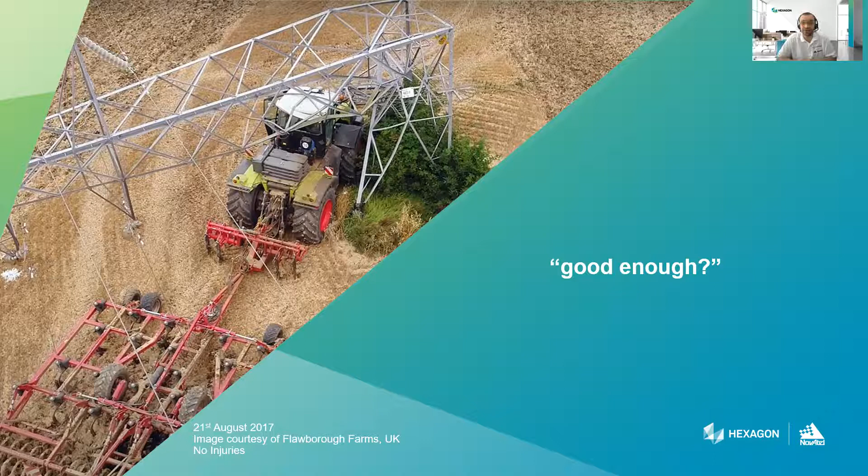In autonomy, in order to be safe, efficient, and reliable, we need to move away from the good enough approach and focus on how we can calculate the vehicle's position with a higher level of accuracy, precision, and integrity. As the production and scale of autonomous machines grow, as an industry, we have the responsibility to avoid and mitigate future risks, thus preventing scenarios like the one shown in the picture here when in autonomous operation.

If we take a high-level view of the GNSS and vehicle control structure, in the majority of agricultural vehicles today, they're all formed of a similar architecture. First, we have a GNSS receiver, some IMUs on the vehicle, and a vehicle controller. And then externally to the vehicle, some form of GNSS constellation, whether that's the American GPS, Russian GLONASS, BeiDou, Galileo. And finally, we have some form of correction source. This might be a local RTK station with transmission over radio or VRS network transmitted over cellular, or even satellite delivered corrections. In a manned solution, these systems usually operate very well in the majority of scenarios.

And the ability to fall back to level one automation is always there. Basically, an operator can take control of the vehicle at any point to resume the operation. But for automation, we need to achieve a position that is more than just there the majority of the time. Any interaction an operator has with the vehicle is essentially a failure of automation.

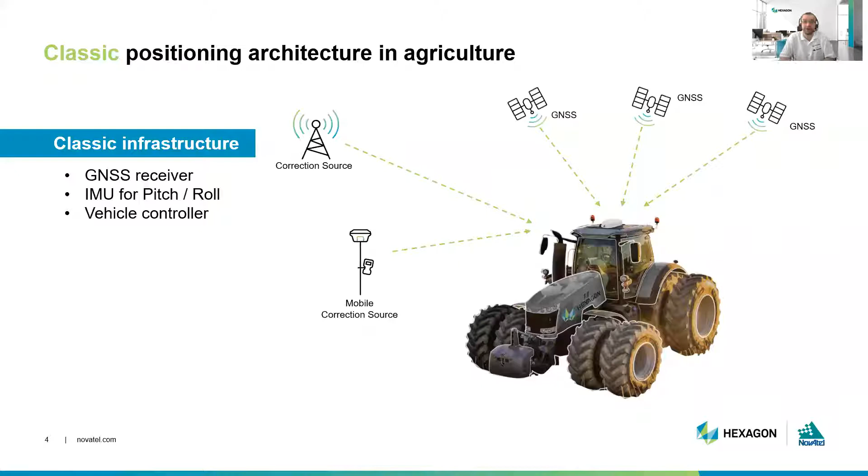So by far, the most common failure of classic GNSS position is the lack of availability or view of satellites. Objects such as pylons, trees, buildings can all have a negative impact on the calculated position. This severity might be from a few centimeter deviation up to a complete and full position loss. The view of satellites is compromised by physical block or manipulation of the signals, thus something very hard to mitigate. A single receiver on its own cannot verify its position, and it's also very vulnerable to jamming and spoofing of positions, which unfortunately is an increasing global risk.

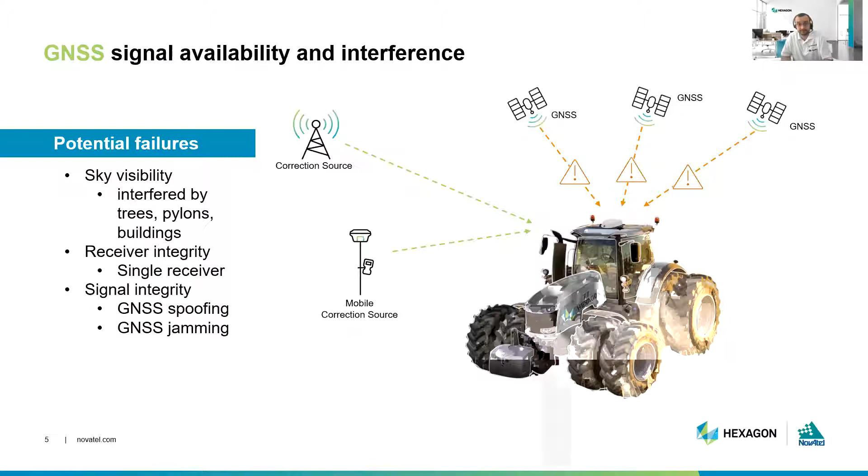For higher accuracy operations, there's a reliance on a correction service. This needs to be delivered somehow to the vehicle. This communication channel, whether it's UHF, L-band satellite, or cellular, is passing through a lot of infrastructure which is vulnerable to failure, even before reaching the vehicle. Furthermore, the correction sources' accuracy and integrity can be very easily compromised, especially at end user installed solutions such as mobile base stations, farmer installed networks.

But then you also have the limitations of the baselines of approximately 40 kilometers. And the further you get away from the base, the further you have a degradation of your accuracy. So the lack of consistency in the solution leads to risks of objects and obstacles, field boundaries, and logistics points that are being mapped having correction source mismatches. How do you know the correction source used to survey a field is the same correction source as the vehicle that's going to be operating in the field?

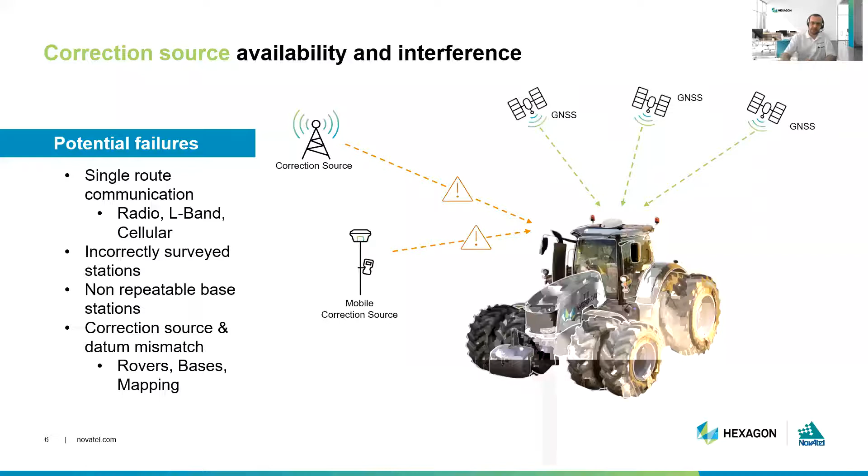And finally, again, a single receiver on a vehicle brings potential ambiguation of the heading, especially at low speeds or when we're static. Compasses and gyros are exceptionally good when movement is occurring on the vehicle. However, from cold starts or after being idle for a length of time, this heading can actually be compromised.

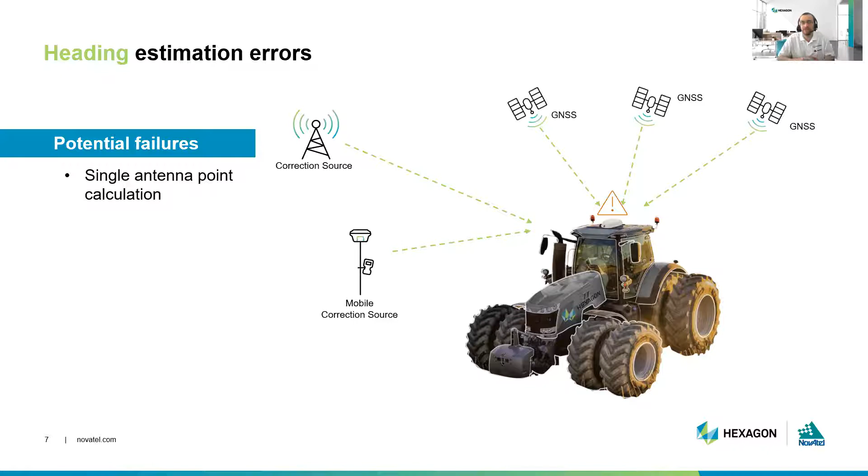Look into the future when we aspire for vehicles to be operating at level 4 automation and above. We want the operations to be smart. We want the vehicle to be stopping for weather. We want it to be stopping for obstacles. We want it to be stopping for ideal spray conditions. So the vehicle needs to be able to effectively and safely resume an operation. And these small factors are essential for the customer to receive the best possible experience of his product.

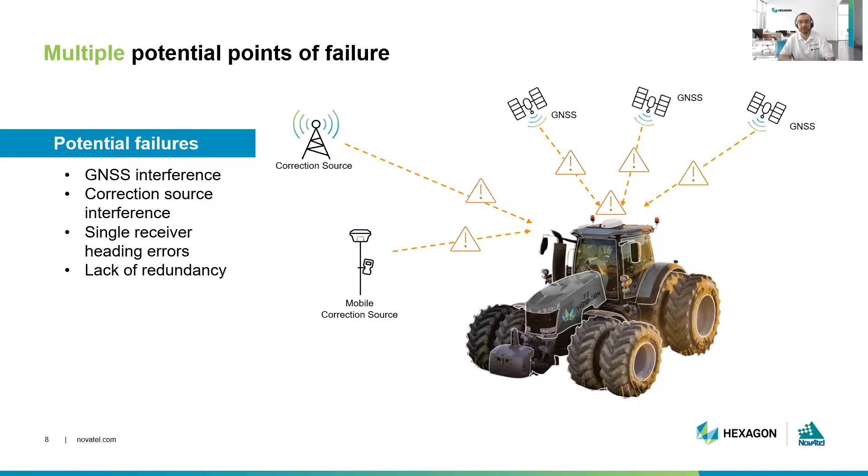Okay, so overall, there are multiple potential points of failure and multiple points of potential ambiguation, which leads to the classic GNSS approach not really being good enough to solely rely upon for positioning in autonomy. So these limitations have been identified by our customers, and it's been driving ourselves to build products and solutions which can help mitigate the scenarios and problems that I've highlighted. So let's talk about some of the ways that we've overcome these problems. Well, first, we need to recognize what is our aim, what is our requirement for position in autonomy.

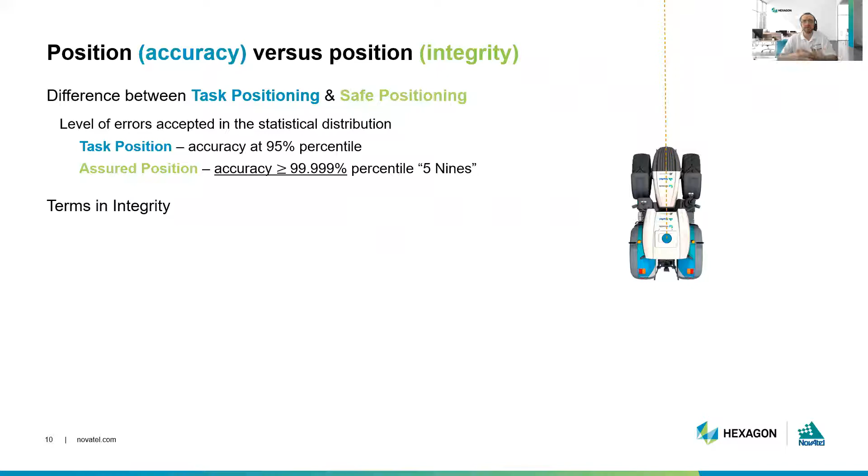From a positioning standpoint, we can break the requirements down into two main signal goals. First is the task position. This is the accuracy that we need in order to achieve our task, whether it's seeding, disking, harvest, or any other operation. Today, we're used to up to 2.5 centimeter accuracy, and that's deemed ideal for nearly all operations. However, the position is statistically only accurate 95% of the time. And this is not reliable enough for full automation. A combination of the factors that I've listed before and some others means it cannot solely be relied upon.

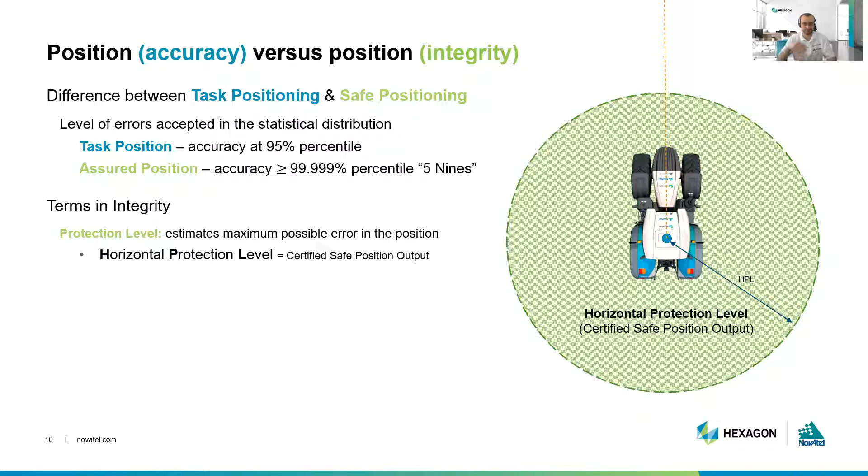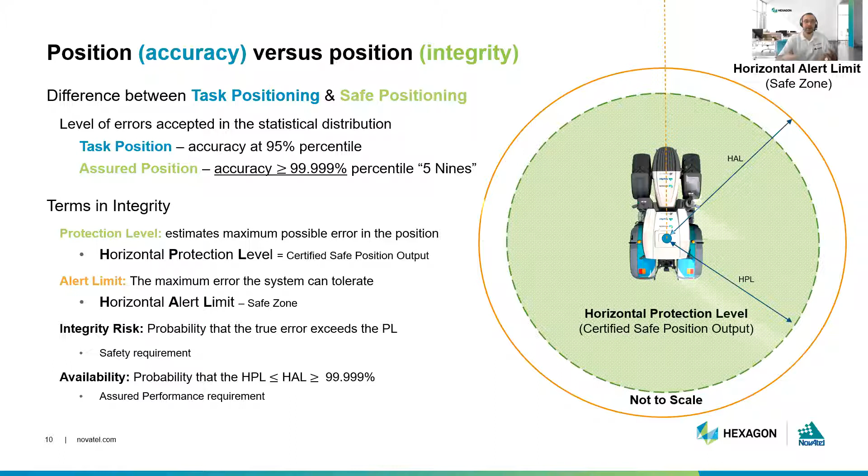The second position is what we call the safe position. And this is an assured position, which ensures up to the five nines that the position is accurate. Now, this means 99.999% of the time, we can assure that that position is within the accuracy that was stated. So based on the application and scenario, the aim is to keep the position output, or the HPL, under a safe zone or a threshold, with an integrity higher than the safety requirement of the system. And only when this criteria has been met can you provide an assured position for 99.999% of the time.

So from the Hexagon and TerraStar perspective, there are several ways in which we're building up the confidence, integrity, and availability of our solutions in order to move away from the classic good enough towards assured positioning. One key part of the solution is ensuring that the corrections or the correction services used can be consistent across the entire fleet of vehicles and data providers that might be involved in the operation of the autonomous system. The TerraStar service can provide an automotive safety and integrity level required for the customer's particular requirements.

Across the entire chain of the solution, redundancy and risk mitigation has taken place to make sure that we can help our partners achieve their functional safety goals. These services are available globally, thus removing the requirement and reliance on local infrastructure or even mobile base stations as part of the solution.

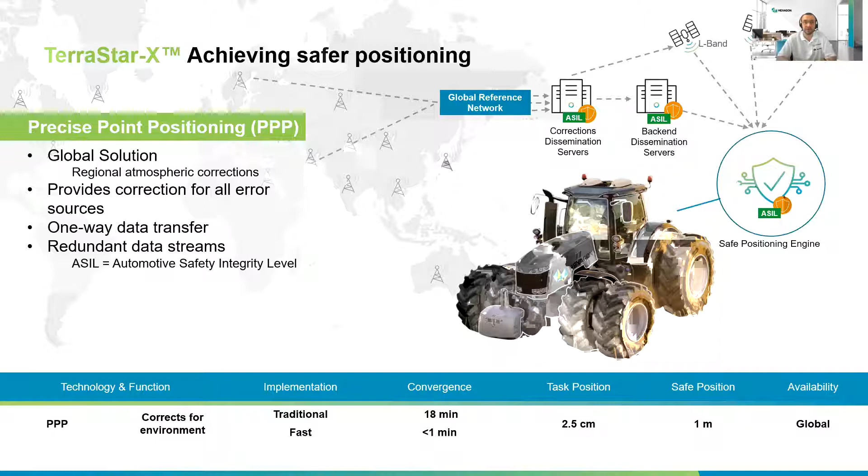Solving the problem of heading and position integrity, multiple receivers can actually be paired with each other, which can give higher levels of position confidence as well as static heading from initialization without the need for an operator to move the vehicle or calibrate like would be with a single GNSS with IMUs.

The ALIGN function today already exists within our receivers' firmware, and it provides a quick way of pairing two receivers for reliable heading, or allowing multiple receivers on multiple rovers working together in proximity, which is ideal for a leader-follower type scenario or implement guidance. That way you can get a reliable relative position between multiple points in a field.

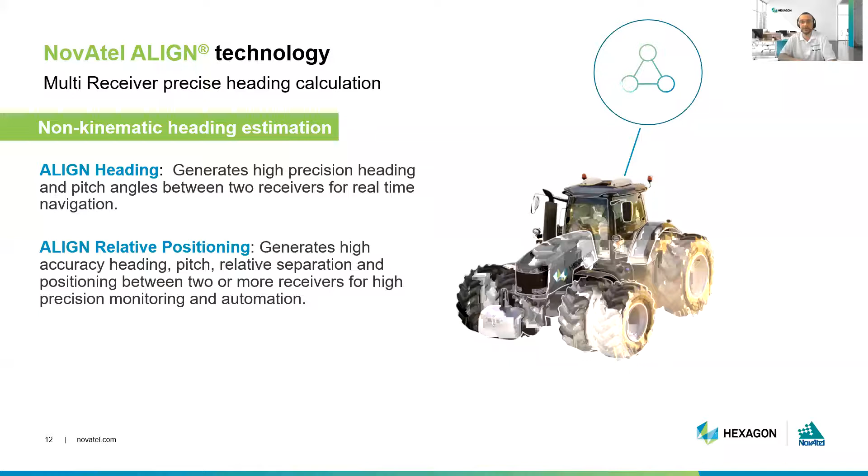Furthermore, depending on the use case, it's possible to bring extra sensor information into the positioning engine. This might take the form of gyroscopes, which we have already added with our SPAN technology, which tightly couples the GNSS with the inertials for continuous operation through poor satellite availability.

And for the autonomy operations, this is being extended further and improved upon with the integration of visual odometry, utilizing our scene and environmental perception cameras, as well as physical sensors such as wheel angles and impulse sensors.

So only when multiple positions created by GNSS, visual odometry, IMUs and sensors are merged and fused together can the true vehicle position be actually understood with the higher level of integrity that is required for reliable autonomous operation, thus separating and distinguishing positioning solutions required for autonomy from positioning solutions traditionally used.

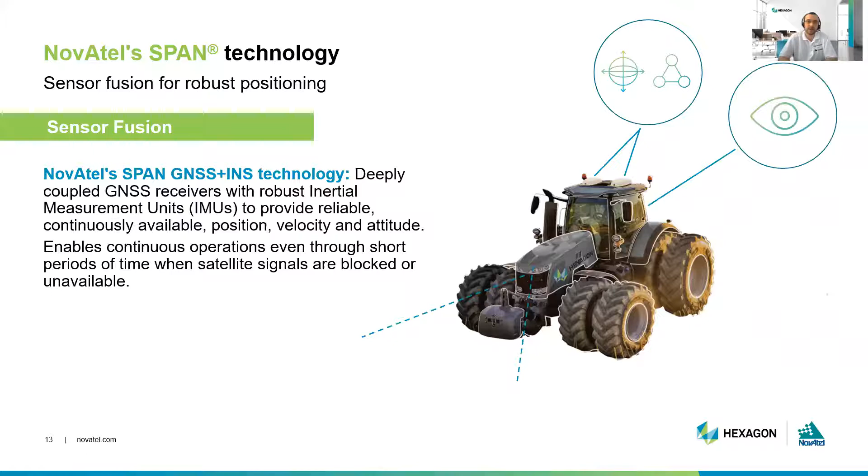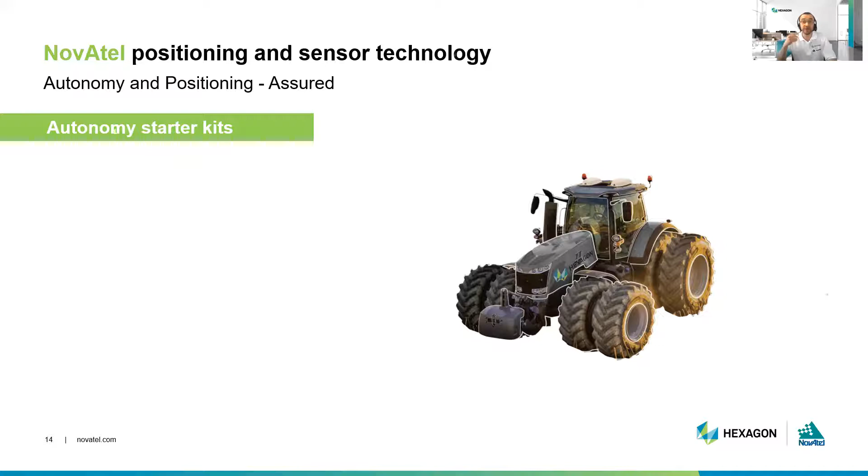So, to summarize, to help our partners in 2020, NovAtel launched its positioning and autonomy kits to aid with platform developments. Our kits are modular to meet your requirements and to help solve particular problems. So first we have the GNSS kits, which provide modules such as the absolute heading with the ALIGN software, the sensor fusion with the SPAN technology, and access to the TerraStar correction services.

Secondly, for those requiring sensor hardware, using the expertise from our AutonomouStuff division, we have a range of sensors including radar, LiDAR, RGB cameras, stereo cameras, and the supporting hardware to enable obstacle detection, obstacle classification, and simultaneous localization and mapping, or SLAM. And finally, we offer development services to assist our partners in achieving their requirement goals. This can reduce time to market as well as provide a more robust positioning and perception solution.